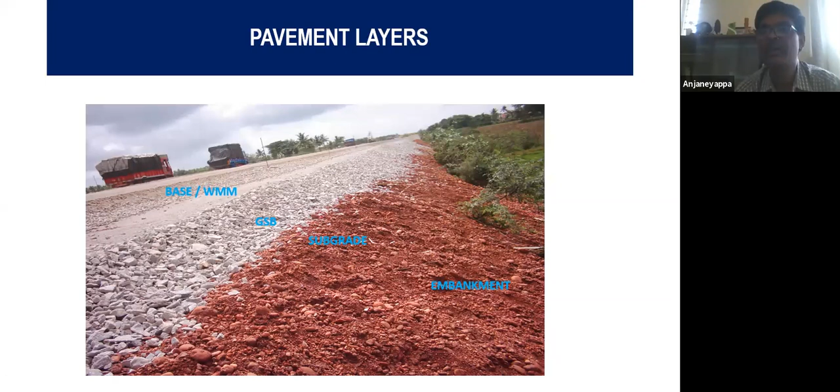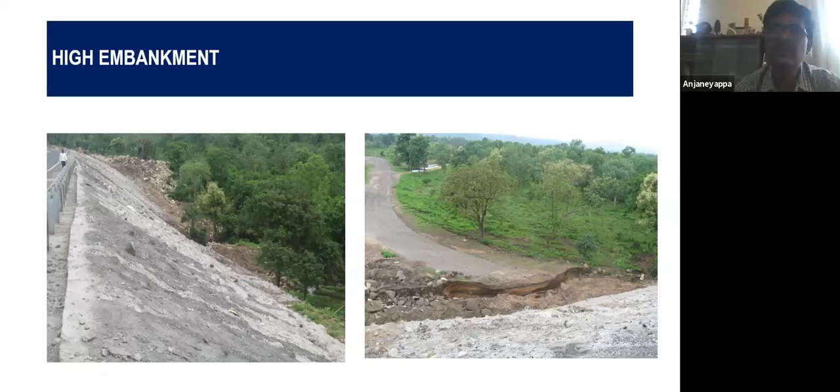This means the road industry uses huge quantities of materials, starting from earth, soil, aggregates, concrete, and bituminous materials. To summarize, we use about 10 lakh cubic meters for a two-lane road.

For a two-lane road, 10 lakh cubic meters. You can imagine a big tipper carries 20 cubic meters. For about 100 kilometers of two-lane road, we use 10 lakh cubic meters of soil, and about half of that, 4 lakh cubic meters of jelly, the aggregates, for every 100 kilometers of two-laning.

By the time we finish a 100 kilometer 4 or 6 laning, something like the Bangalore-Mysore road we are doing now, we are going to remove these kinds of hillocks from the mother earth. So huge is the quantity of aggregates we consume in road construction.

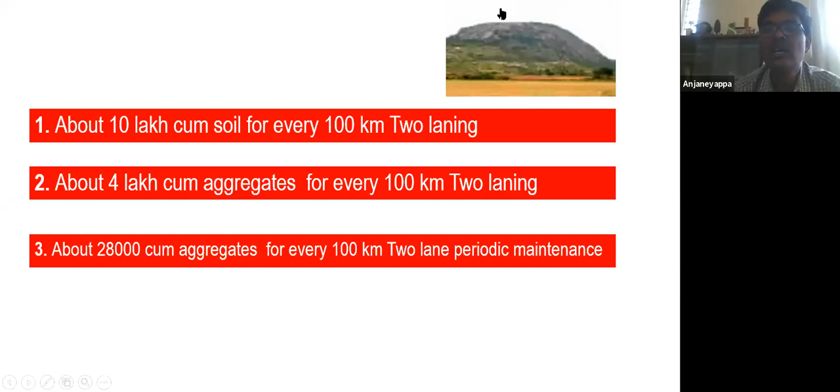Because of this, what are the challenges we face in the road industry today? Good materials - why good materials? Even marginal and alternate materials and their sources are depleting day by day. In addition, because we use good materials for subgrade and good aggregates that need to fulfill so many physical requirements, many times we may not find sources near the project site.

We may have to go away from the project road, maybe to an extent of the lowest 5 kilometers, and the farthest can be 60, 70 kilometers in northern India. This means the road industry is incurring huge transportation costs.

And when it comes to extraction of jelly, the aggregates, or even soil, there are stringent regulations from various government authorities, be it the forest department, mining department, or revenue department. So that is another constraint.

Forget about all these things, the biggest issue is, as I showed in the first picture, the huge embankment and the stream - because of this road construction, there are new erosions, new sedimentations, we are creating new streams and new courses for these streams, and we are creating numerous ditches in the name of excavation. So it's the biggest challenge.

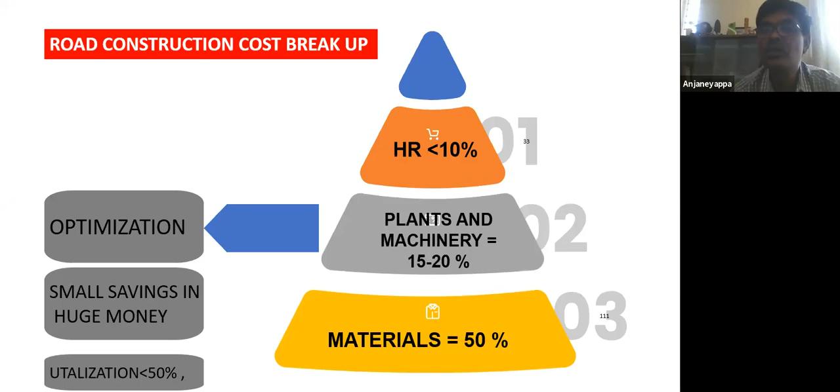Needless to say, the HR sector in the road industry is not that organized. Yes, to an extent it is organized when it comes to the big corporate companies, but most of the time this sector is unorganized. HR sector is highly unorganized, and probably in the near future we should foresee some kind of organized way in that.

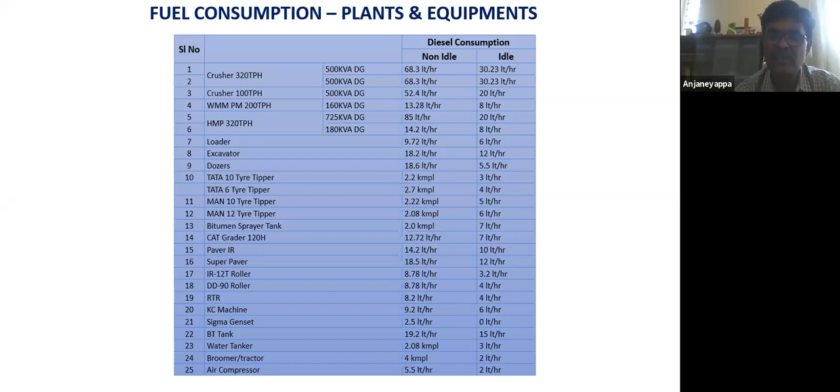Look at this - I have summarized, calculated for a 1 kilometer, one lane new road, in which we consume about 10,000 liters of diesel. This is not a small thing. Calculate this - I've highlighted for 1 kilometer, one lane. Imagine we have a huge road network of 60 lakh kilometers, and the majority of that warrants rehabilitation or new construction. Imagine what consumption of fuel is expected in the road industry.

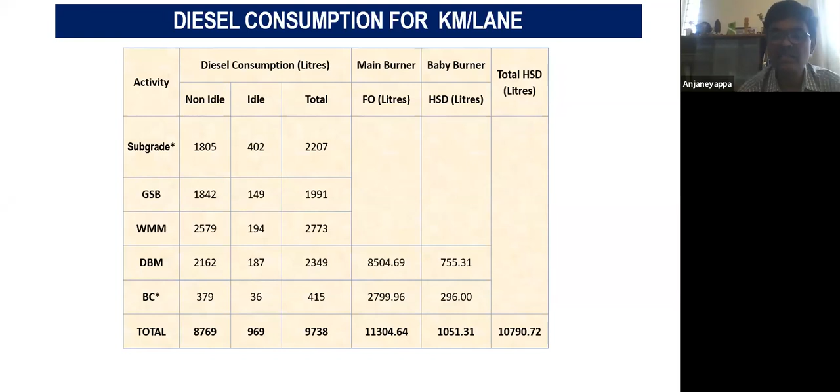And as I said, this is not just for new construction. Every 5 or 6 years we go for maintenance activity, which again consumes significant, considerable fuel. So this is another thing we need to worry about.

I was talking about the unorganized sector as far as HR is concerned in the road industry. Yes, it is highly unorganized. To a certain extent it is organized when it comes to supervisors and above - engineers and above - at least we have good corporate companies there.

But forget about engineers, the biggest employer is the road industry. That means if we want to create employment in society, we need to engage in road construction. That is why all governments, irrespective, do this many times. The road industry is the backbone for socio-economic development. If you want to build up the GDP or NSDP or anything, we need to start new road construction. So such being the importance of the road industry, and such being the biggest employer of human resources, it is still highly unorganized.

The key man in this road industry is the labor, the so-called skilled operator or skilled worker. Why I would say this is more important than an engineer is because, end of the day, in my industry - the road industry - though the DPR is prepared by an excellent consulting firm, and we assume we have an excellent management firm for supervising construction with all engineers and resources required, and further assume we have world-class equipment for execution and very good materials for road construction...

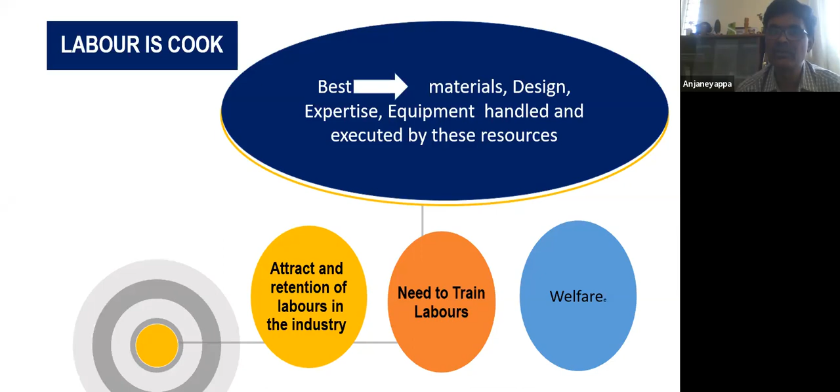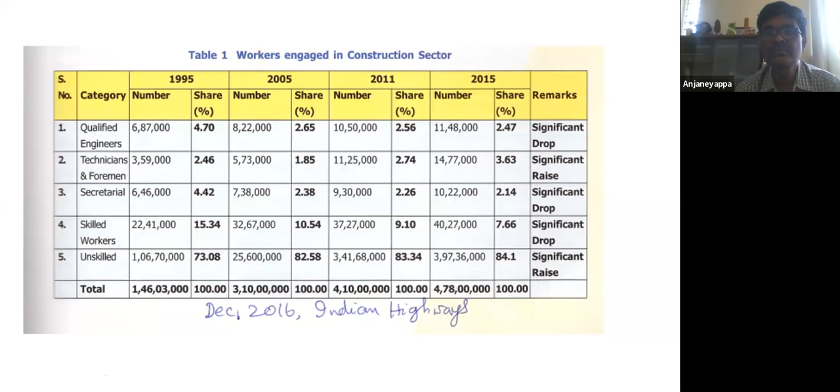So there are some constraints the road industry is facing today. You know that there are approximately 60 lakh kilometers, statistics is statistics, and we have a very small quantity of national highways, just about 2%, less than 2% of national highways, and that less than 2% of road network carries 40% of the traffic. If you add state highways to the country's network, the state highways and national highways together carry about 65% of the traffic. And if you look at the breakup...

So we have got about 30% of 4-lane roads, 25% of 4-lane roads, and about 50% of 2-lane roads in NH and SH, and about 26% of single lane to intermediate lane road network.

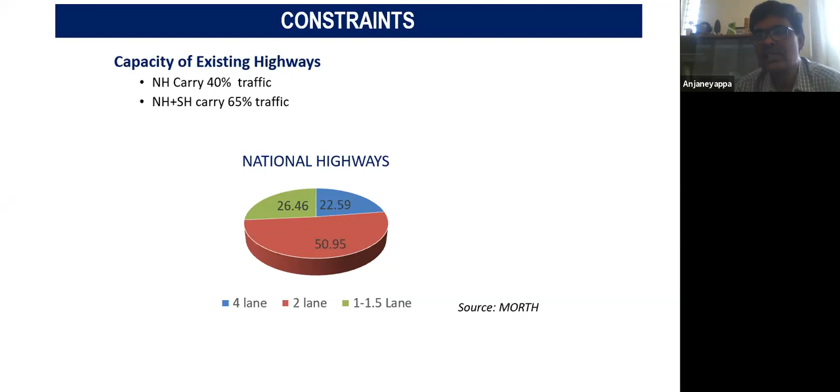What does that indicate? What is the takeaway from this? That means so far we could widen or construct multi-lane or 4-lane roads to an extent of only 30-40%, and there's a long way to go. Still another 50-60% of roads need widening as far as NH is concerned, and about 30% of state highways still need to go for 2-lane. We have got huge traffic, and almost all national highways warrant 4-lane, and almost all state highways warrant 2-lane roads, and even some state highways warrant 4-lane roads. So much is the requirement and demand.

So that is one thing. If you look at the past 2 decades, one question is, what is the investment made on the road industry in the last 2.5 decades?

And that is for new construction. We are good at constructing assets, but even today we haven't realized and geared up for the maintenance aspect. Creating an asset is one part, and maintaining it to customer and societal satisfaction is another big challenge. We are good in capital investment and creating assets, but not good in maintaining them. The end result is that maybe after 5-10 years after new construction, we end up with bad roads, and if we don't maintain further, we may have to go for reconstruction again. So maintenance of existing road infrastructure is the biggest challenge in the road industry.

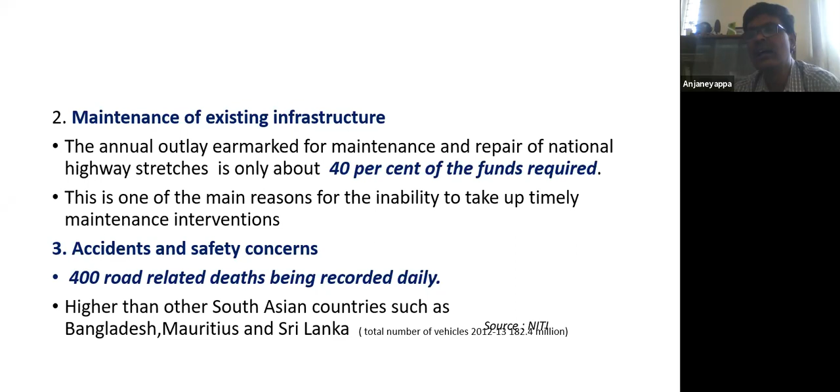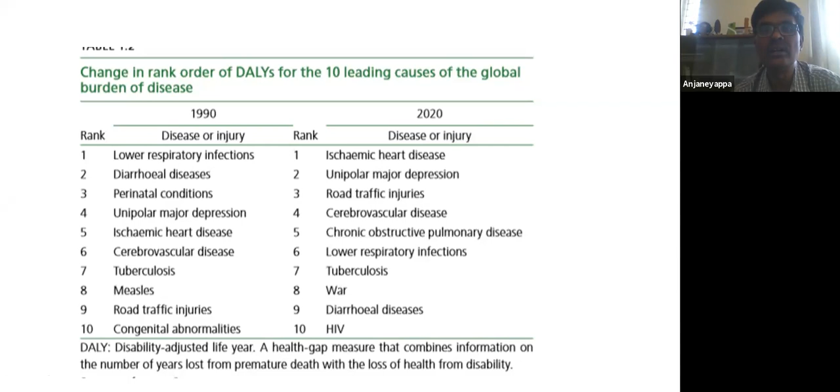The government is very serious on this, at least in the last decade. If you take the biggest causes for human death in the world, in 1990 road accident deaths were in 9th place - the first cause was respiratory infections in the 90s, and the 9th cause was road traffic injuries. Take today, 2020: the biggest reason for human deaths is heart disease, and the third highest reason is road traffic injuries. We have elevated from 9th position to 3rd position, and so many lakhs of people are dying every day, every second. This is the biggest concern, and not enough concentration is on this.

These are the death rates, and when it comes to Karnataka, we are not lagging as far as accident deaths are concerned - we stand somewhere 3rd or 4th position in India in terms of highest death rates. There are many reasons for these accidents: overspeeding, driving on the wrong side, overtaking, use of mobile phones, violations. The biggest reason for deaths is overspeeding.

So controlling the speed is one method to control accidents. You may ask, what is the purpose of a road if you control the speed? The high category roads, national highways, state highways, are meant for mobility. The lower category roads, like village roads, are meant for connectivity - connecting to give access to social, economical, educational facilities, hospitals, schools, marketplaces. Speed is not the criteria there.

When it comes to higher category roads, national highways and state highways, the intention is to give mobility to the extent possible. That means if I want to travel from Bangalore to Hubli, I need to maintain a certain speed so I can reach Hubli in the right time. So there I cannot control the speed - there should be enough speed, enough mobility. So maintaining mobility while controlling safety is the biggest challenge today for stakeholders in the road industry.

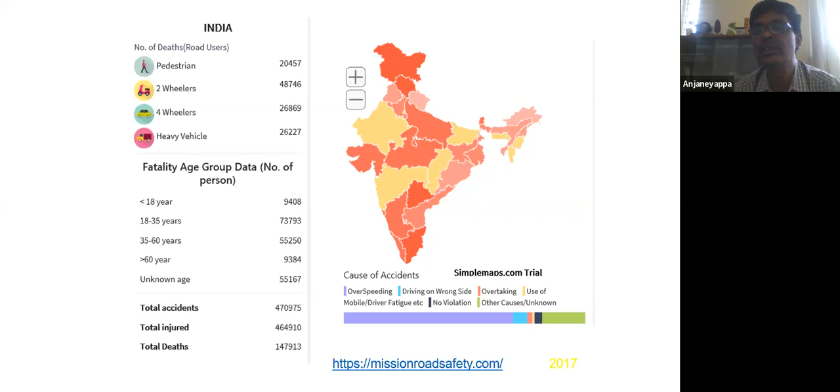If you take the various reasons for accidents, about 70% of factors are contributed by the human being. Because of him, accidents are occurring. But there are engineering causes which we road engineers can take care of. That's about 26 to 28% contribution from the people involved in road building, road design, road construction. So concentrating on constructing forgiving roads, safe roads, is the need of the hour, and that is the biggest challenge today. We road engineers are contributing to road accidents to an extent of 20-30% by constructing bad roads, and we need to take care of that.

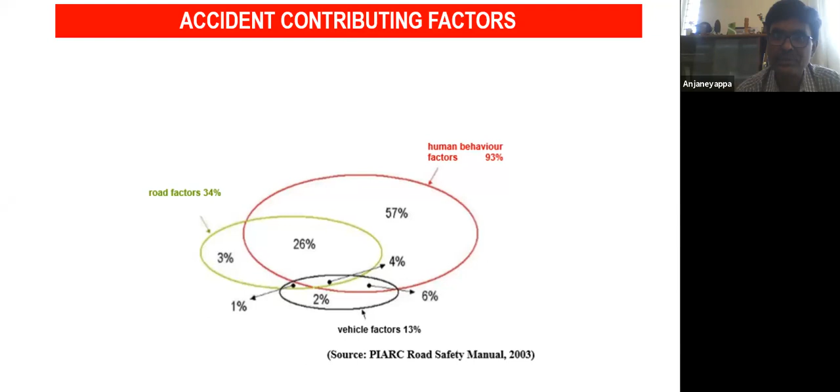So what is the biggest loss for the society? It is estimated that about 1 to 3% of the total GDP is the loss to the society. And it is estimated that about 500 billion is the loss to the world, just because of road accidents.

Then comes the carbon footprint, the emissions. If you take global emissions, we are the biggest contributor. On one side we need good roads, we need to construct roads, we need to maintain roads, because that is the backbone for economical and social development. On the other side, when it comes to environment, we are polluting to the highest extent. Transport contributes 14% of total global emissions. Transportation sector contributes 14%, that is a significant portion. In that, the road sector alone contributes 72% of that 14% of emissions. It is not a small thing. It's really a challenge for the industry and engineers to worry about.

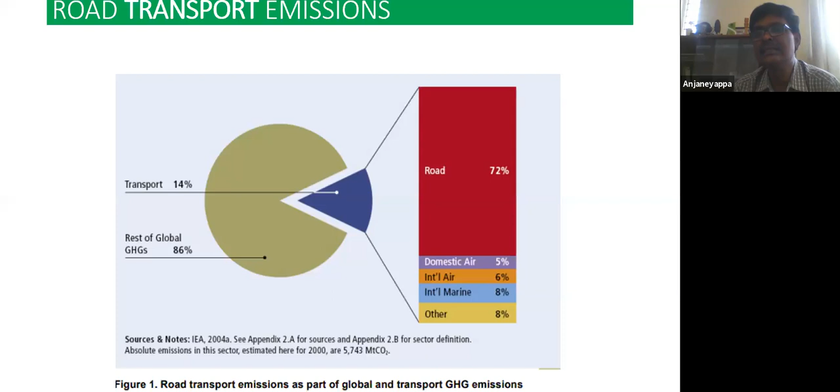So what are the answers for all these questions? Whatever challenges I have mentioned so far, there are no simple overnight solutions. And what is required? Like other big people say, I also concur, some kind of creative mind, some kind of out of box solutions are required to tackle that. Can we solve this overnight? No, we cannot. But we need to accelerate the solutions, the alternatives in this direction. That's what the industry is doing, but the rate of changing this is not sufficient. I don't know the reasons.

Having listed so many challenges, you may ask, are we not doing anything to answer these challenges as solutions? Yes, we are doing, but as I said, it is not enough.

Some of these alternatives are, as we all know, we need to go for locally available materials in the road industry. When I say locally available material, it can be industrial byproducts, marginal materials - all these can be used in appropriate layers, at bottom layers, through appropriate engineering measures. Please remember, I trust God has not created any waste material. There is no waste material on this earth. So let us not use the word waste material - at the most we can say marginal material, alternate material. So they are also precious materials, and we need to go for them in a big way. And of course we are at that - you name any material, yes it can be used.

No need to reinvent the wheel. If you ask, can we use this material? I would directly say yes, without any second thought. Only some modification, some changes, some engineering is required to use those materials, and these engineering measures are not complex - they are very, very simple. So any material can be used. We need to go for locally available materials so that we can reduce transportation cost, reduce the depletion from excavation, the extraction of jelly, the aggregates from the quarries, from the mother earth.

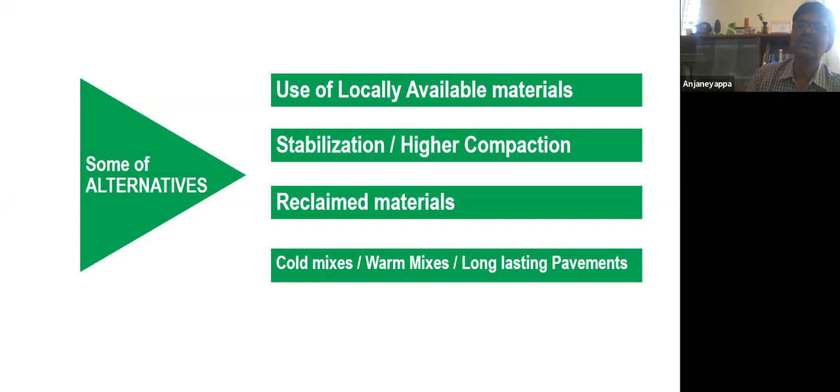And the second alternative we are doing today is stabilization. We need to go in a big way with stabilization - it's the oldest technique, but we need to go for that. Even if you look at the pavement design in previous revisions, not much concentration was given. It was given, but we were not practicing it.

If you look at the latest revision, IRC 37, they have given enough thrust on this. We need to go for stabilization of the pavement layers. What are the advantages of this? We can reduce the thickness of the top layers so that material consumption can be reduced.

We need to go for reclaimed materials. We have to reuse the materials. It's old technology, there's no need to reinvent it. Yes, we need to go for the reuse of materials, and of course there are technologies available today.

We can think of using cold mixes where we can reduce the emissions. We can extend the working hours. And then we should go for long lasting pavements, where we design the pavement such that it lasts for longer durations. So these are some of the alternatives that the industry is currently practicing.

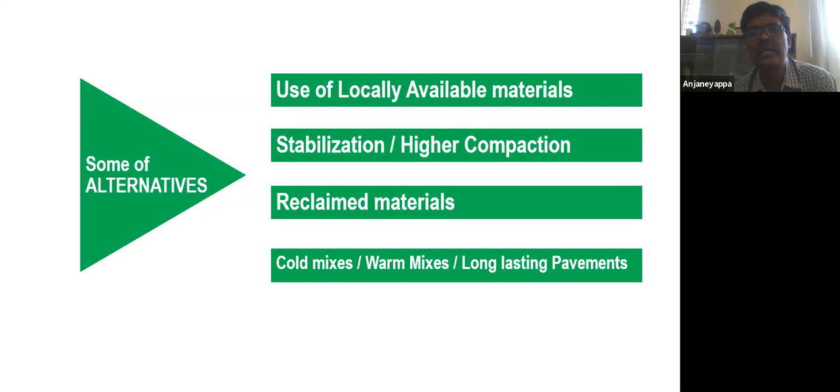Is that sufficient? Definitely I would say no, it is not sufficient. It is for the young engineers today who should come out with a solution. I am not foreseeing any immediate magic solution, but I am damn sure that the next generation, the budding engineers, will come out with big solutions for all these challenges.

We need to stabilize the subgrade or these base layers or sub-base layers so that the layer thicknesses can be reduced. If you take the thickness of layers, it's about 1 meter today. If you cut open any good pavement, you find a 1 meter crust. So we can reduce the consumption of materials.

We can stabilize weak materials, any weak materials which have low strength, low modulus, by either mechanical stabilization or by adding stabilizing agents, conventional ones like lime, cement, or anything. There are also a number of commercial stabilizers available in the market that we can make use of.

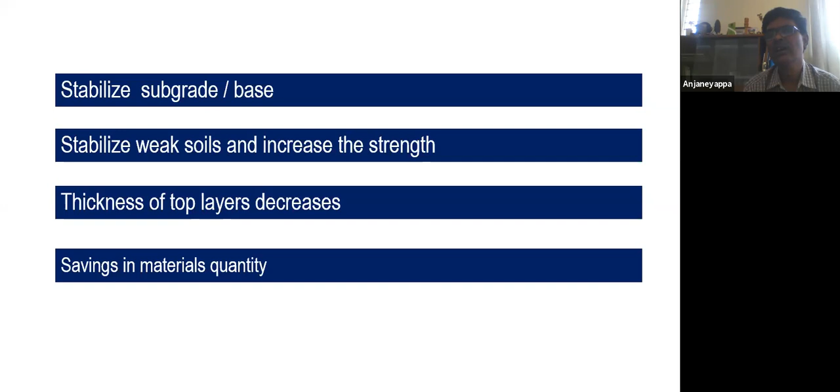We can use commercial stabilizers. There are many, but the only concern is you have to work out the economics. If it is economically viable, you can go for the use of commercial stabilizers. But still, in a big way, you can rely on conventional stabilization techniques using stabilizers as well as mechanical stabilization.

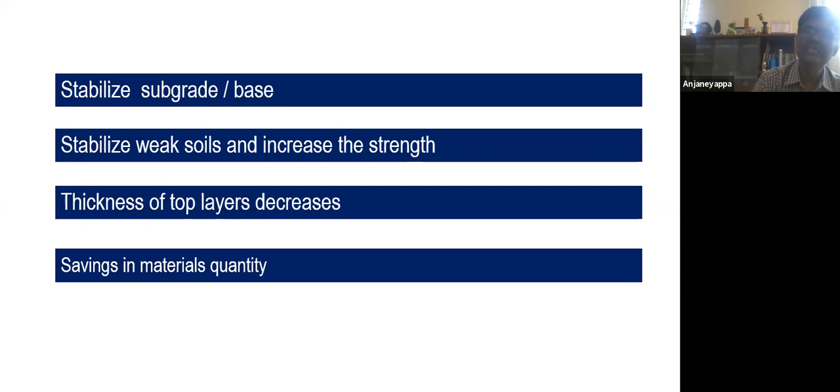So these kinds of stabilization result in a huge reduction in quantity of materials and thickness of pavement layers. If you ask me, are there any guidelines or methods? No need to worry, everything is in place. Not only today, it has been in place for several decades. There are a number of IRC guidelines in India or global guidelines where we can make use of these guidelines without any fear.

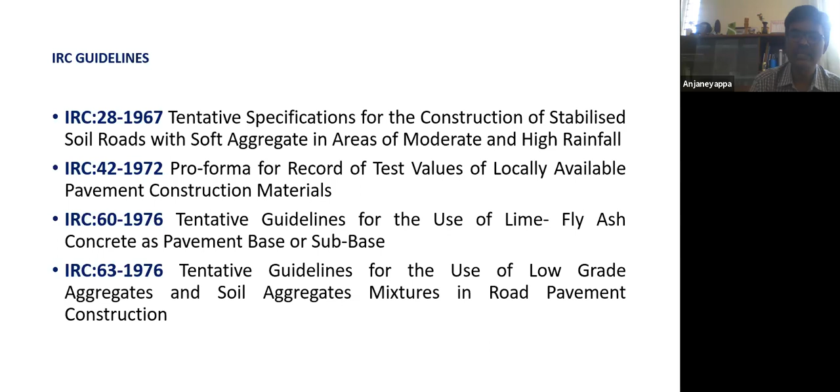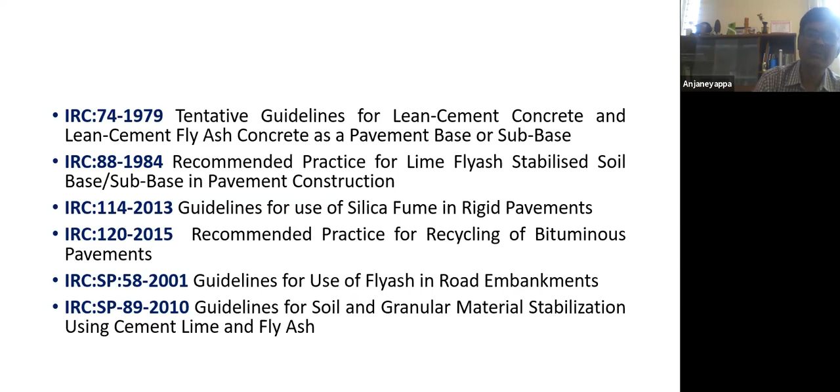So we can make use of slag. Of course, it is very much used today. The slag can be used as granular layers. It can be used in asphalt layers. It can be used in concrete pavement as both unbound and bound layers.

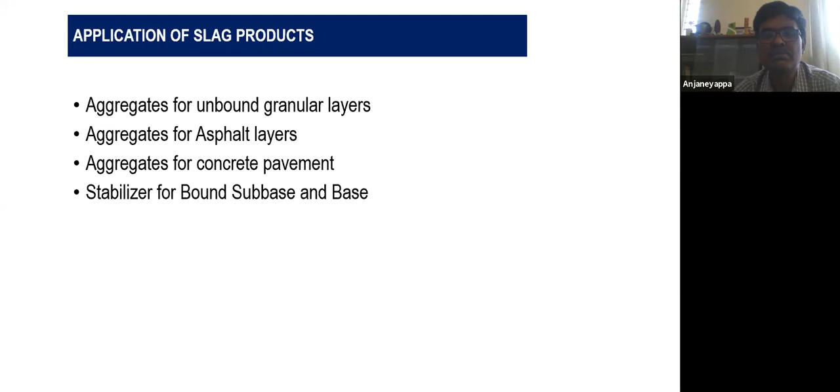Why does this happen, in spite of such a huge amount of money invested and good materials used? This is because of improper design, especially this kind of distress results from improper design and improper bitumen used in the mix. So we have to take care of that.

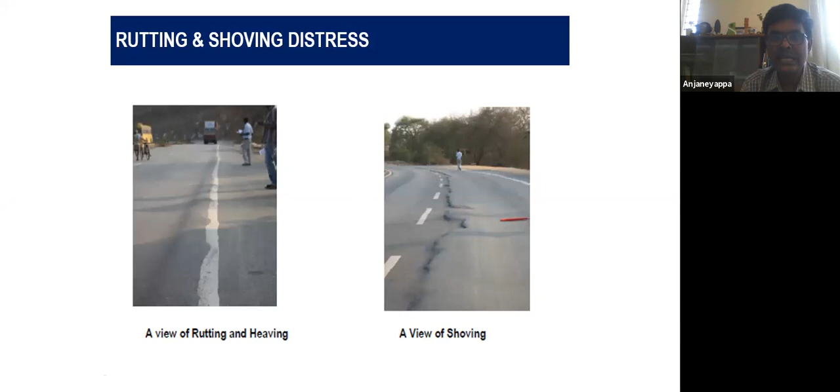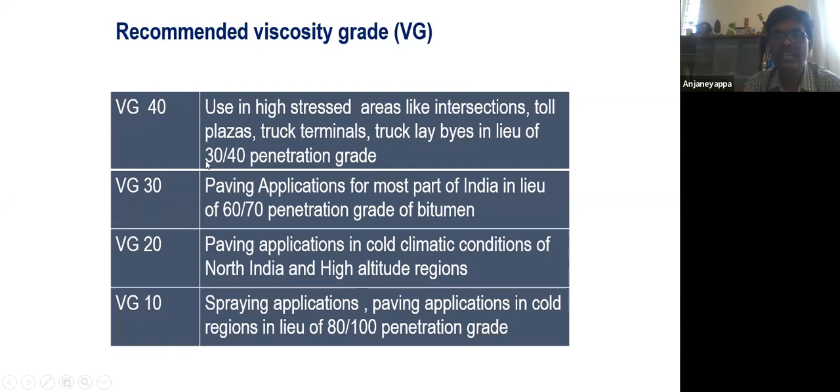There are many things to tackle those kinds of problems, apart from using good mix design, good gradation of aggregates, and good binder. Today we have different binders based on our requirement. Generally we go for VG40 or VG30, viscosity grade 40 or viscosity grade 30 bitumen, for construction. So based on the traffic requirement, we select the appropriate bitumen. Selection of bitumen is an important task. There are different modified binders in the market for construction—polymer modified, rubber modified.

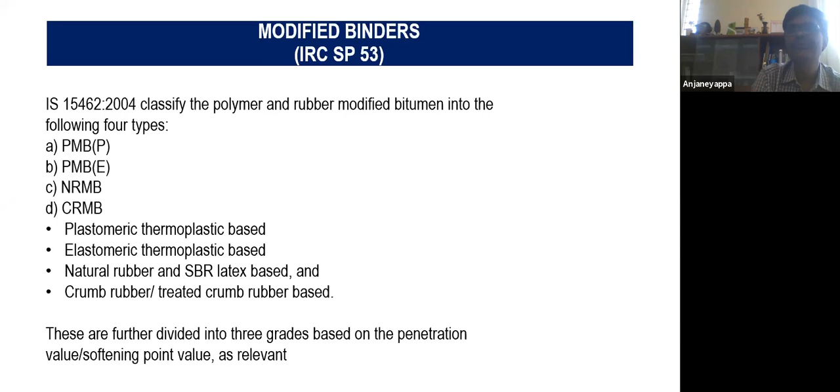There are different varieties in polymer modified or rubber modified bitumen, and all these modified binders can be made use of. The advantages of using these modified binders - these binders are used especially in the surface layer, the bituminous concrete surface layer, not in the bottom layers.

Using these modified binders reduces the susceptibility to temperature variations, because bitumen mix is thermoplastic, and the performance and stability of this asphalt mix depends on temperature variations. A modified binder gives high resistance to deformations and deflections. It reduces cracking, reduces aging, gives good adhesion, and long lasting life, and overall improves the performance of the bituminous layer.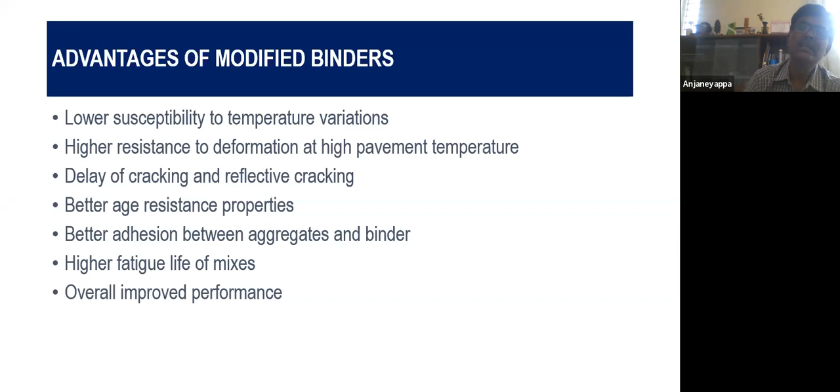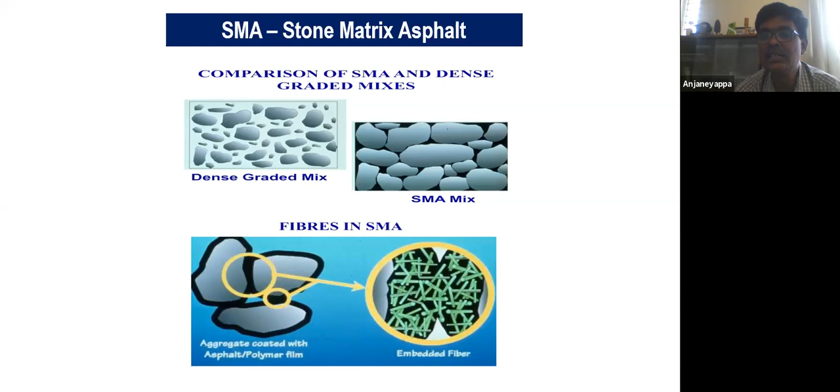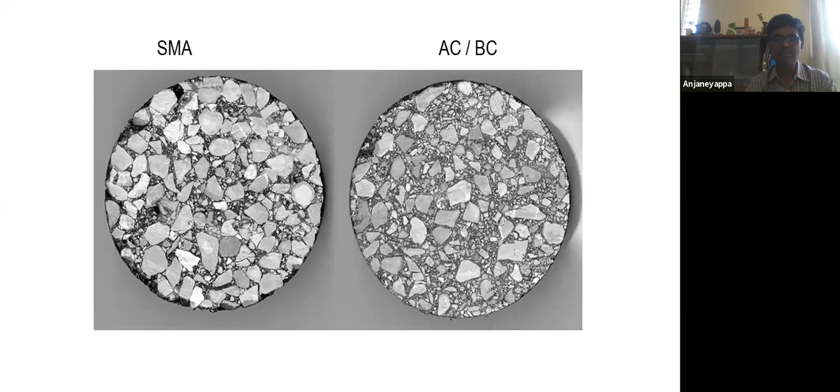So there are different mixes in use today. For the last decade we have been using different types of special asphalt mixes. One such mix is called stone matrix asphalt. Wherever there is high truck traffic or high axle load traffic, engineers recommend stone matrix asphalt, which has a high quantity of binder, bigger size aggregates, and fibers in the mix. This reduces deflection or deformation due to high axle loads, so the life of stone mastic asphalt is longer compared to the bituminous concrete surface.

For the last 10 years we have also been using, though not widely, stone mastic asphalt as a structural layer. Then there is another layer called micro surfacing, used for maintenance of existing pavements, to increase riding quality, to cover depth, and to resist the raveled surface.

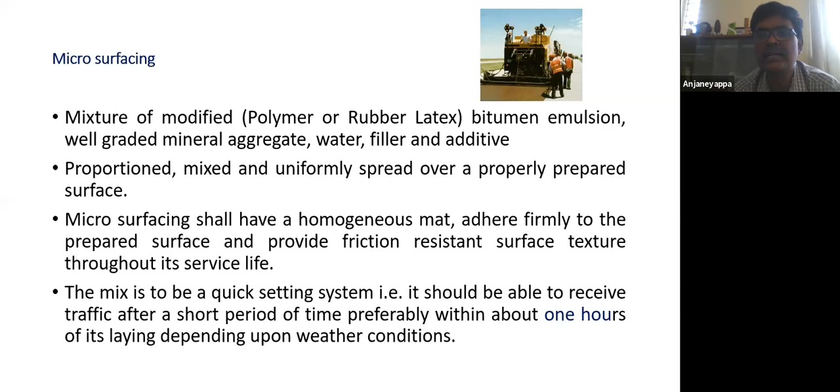This micro surfacing mix is a modified bitumen mix with well-graded aggregates, filler and special additive. We don't need any rollers - no compaction is required. This mix is prepared in special machinery mounted on a truck, so the mix is prepared in situ, spread in situ to the required profile, and it settles within about an hour, after which traffic can be allowed.

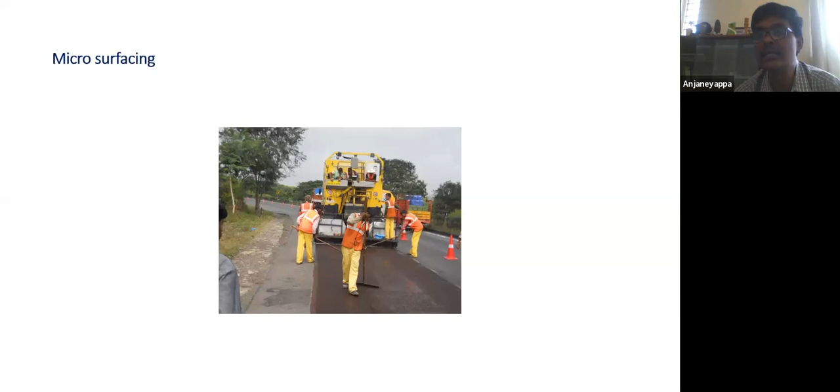So what are the advantages? It reduces some kind of emissions and can be used as a maintenance layer. Performance reports say it gives good performance, but the precaution is that this is a thin layer, and any thin layer is only meant for maintenance - it will not add structural strength to the pavement layer system.

This is another way of micro surfacing. If you take the bituminous mixes, they are broadly categorized into 4 categories. We call it a cold mix when used in the 0 to 30 degree range of atmospheric temperature. We call it a half-warm mix if used when the mix temperature is in the range of 65 to 100 degrees. We call it a warm mix if used in the 100 to 140 degree centigrade range. We call it a hot mix when the mixed temperature is more than 130 to 140 degrees during preparation.

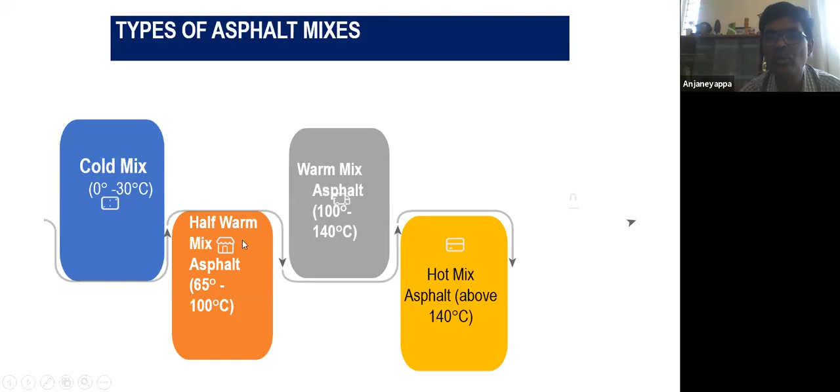So all the mixes we conventionally see are hot mix, and nowadays cold mix is also gaining momentum. Micro surfacing is a cold mix, and warm mixes are also gaining momentum for their advantages. We can use cold mixes for any layer where we would otherwise use hot mixes, using different types of emulsion - rapid setting, medium setting, or slow setting - depending upon the type of mix, whether it is dense bituminous macadam, binder layer, bituminous concrete, or any other thin layer.

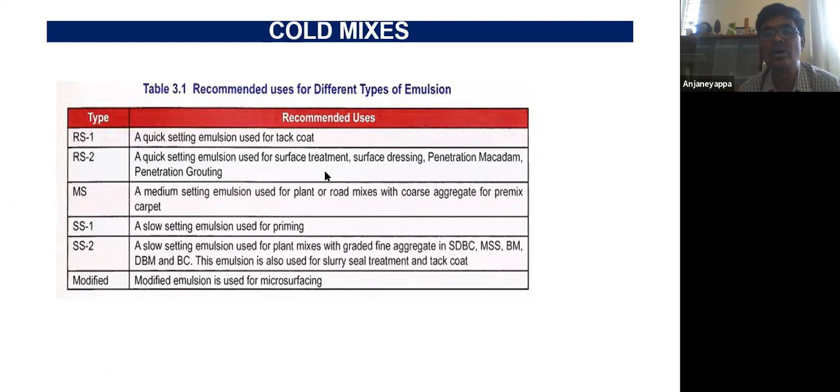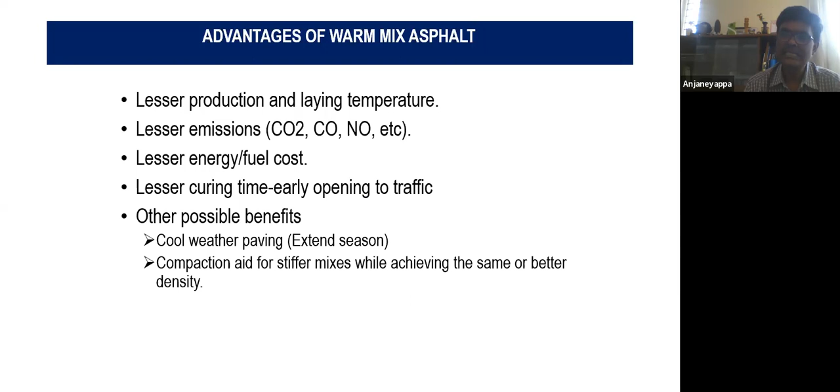So this kind of cold mix is in use today. These practices have been in use for the last decade, gaining momentum in our country. The advantages of using warm mixes: while hot mixes need temperatures more than 130-140 degrees, warm mixes can reduce the mix temperature by about 30 degrees. This reduces fuel consumption, reduces emissions, and allows earlier opening to traffic. Another advantage of warm mix is that we can construct roads even in cold weather. There are other mixes too, like open graded friction course.

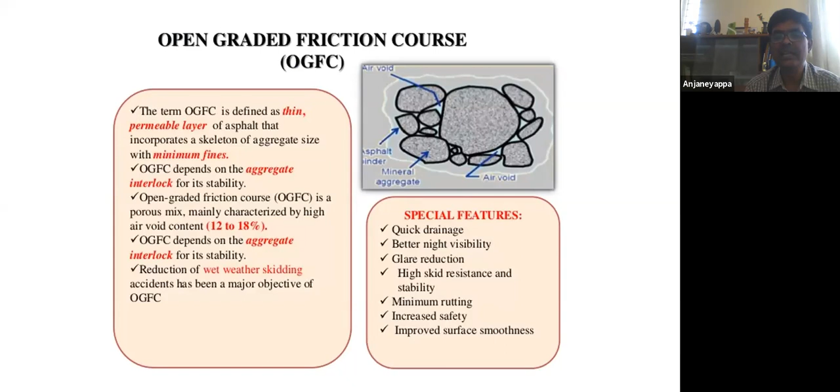This is a thin permeable layer where strength comes from aggregate interlocking, and this kind of layer reduces wet weather skidding. Especially these mixes are used in high speed roads where speed is high. The advantages of using open graded friction courses are quick drainage, better night visibility, glare reduction, and rutting problems will be less, so we can have improved safety on the roads.

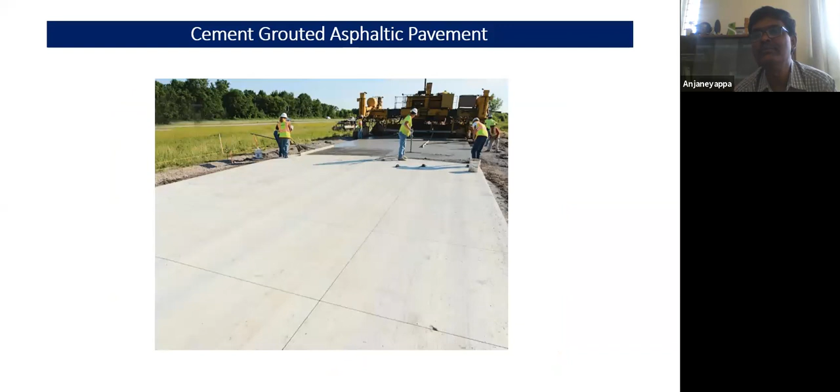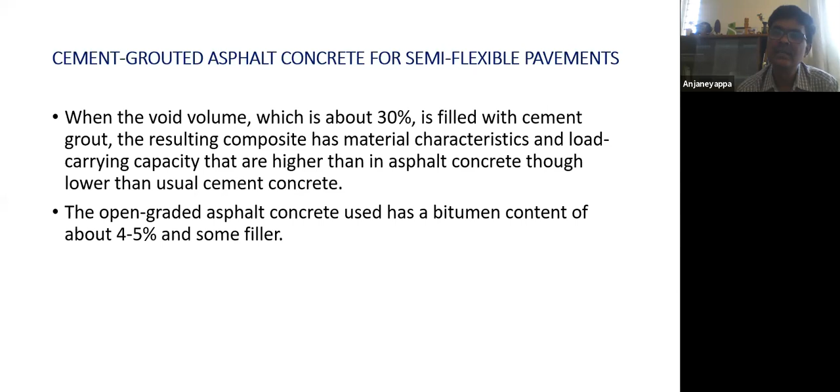People are also, here and there, if you look at the literature, not in our country, trying cement grouted asphalt mixes. So what is that? Cement slurry is injected into asphalt mixes which have high voids in the range of 20 to 30%, and the cement gets injected into these voids, so that the rigidity, modulus, strength and stability increase, hence the performance. People are trying this, but it's not yet in practice, mostly in the laboratory and here and there pilot studies. Not in our country, we are yet to start that.

Then comes white topping, which Bangaloreans are quite familiar with. We have started using this kind of white topping in this decade, and now in a big way, several hundred kilometers of roads have been constructed in Bangalore city using white topping. What is this white topping? It is construction of a cement concrete layer, a thin layer, over the existing bituminous layer. Different types of white toppings are there.

Thick white topping is when the thickness of the layer is more than 200 mm, similar to our cement concrete layer. Then comes thin white topping, that is what we are doing in Bangalore city, where the thickness of this cement concrete layer is 100 to 200 mm.

This is constructed as a bonded layer, and if we want, we can also use fibers. The advantage of white topping is that in a normal cement concrete layer the joint spacing is about 3.5 to 4 meters, but here the joint spacing is about 0.6 to 1 or 1.2 meters. So the behavior is flexible, not rigid, it behaves like a flexible pavement.

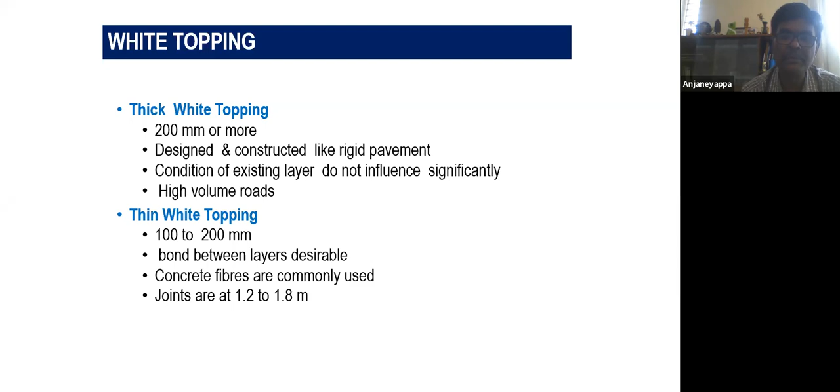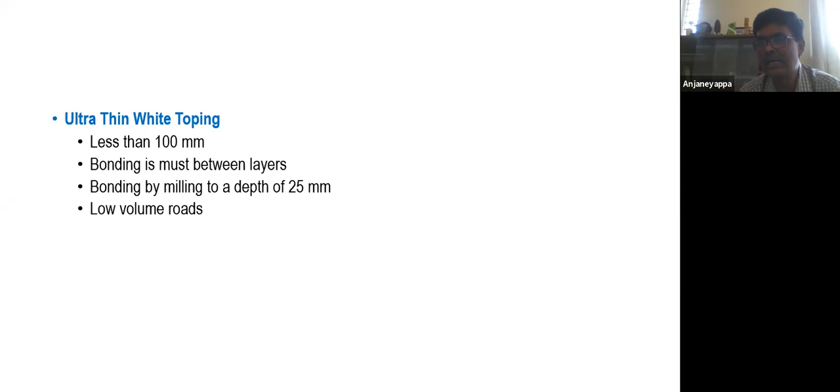Then we have a third type, ultra thin white topping, if the thickness of this concrete overlay is less than 100 mm. This thin topping can be used for low volume roads, arterial or local streets.

What are the advantages of using white topping? Long life, low maintenance if constructed properly. We don't find distresses like rutting or other deformations. It gives high structural stability and structural strength to the pavement layer system. These are the advantages.

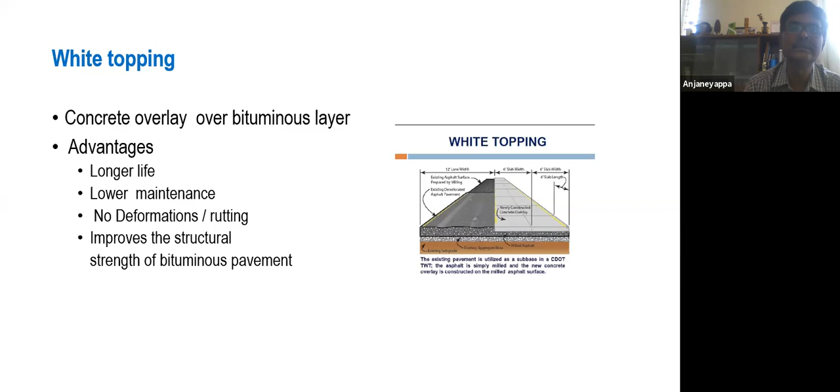Then we have pavements like interlocking concrete block pavements. These can be used for regular roads also, though not quite popular in our country. Here we mostly use them for footpaths, but in other countries they are used in main carriageways also. Here also it can be used. In some states they have used it, in Maharashtra, Kerala, yes, it is used in junctions and streets where digging up for maintenance activities for utility lines is quite high.

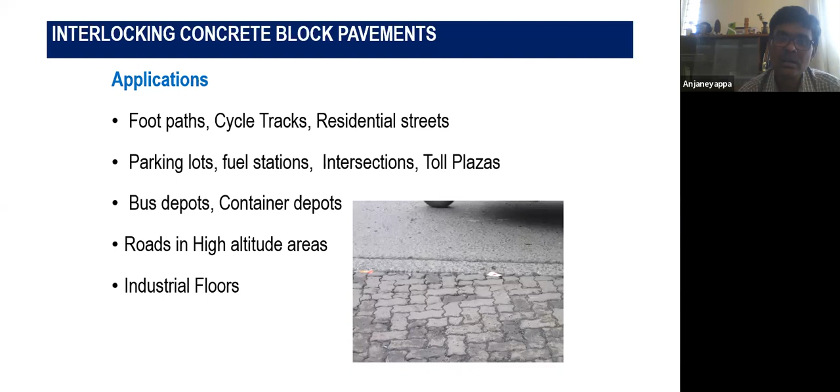The advantage of using interlocking concrete block pavements is that maintenance of utility lines becomes easy. We can take out these blocks, attend to the cables or water supply lines, and then reuse the same materials and reconstruct, so we don't find any distress. This can be used in parking lots, bus depots, regular pavements, footpaths, cycle tracks, residential streets. The only thing is we need to construct in a good way, because most of the times these layers get a bad name due to poor quality construction. So properly constructed ICBP layers give good performance.

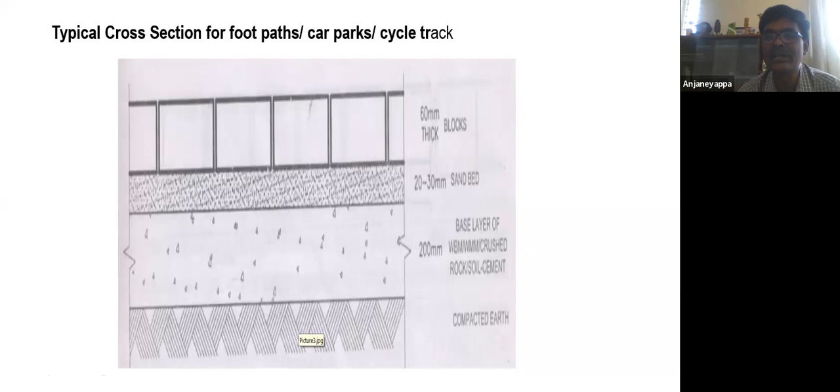This is a typical cross section of the ICBP where you have all the pavement layers. One additional thing is we have the sand bed layer. Using appropriate sand for filling and the sand bed is quite important here, and compaction plays a big role.

Then we have composite pavements. What is this composite pavement? If there is an existing asphalt pavement, we can go for a concrete layer. If there is a concrete layer, we can go for an asphalt layer over that. Or if there is a stabilized layer, we can go for a concrete layer or an asphalt layer. So the flexible behavior and the rigid behavior are combined, and these composite pavements can also be used.

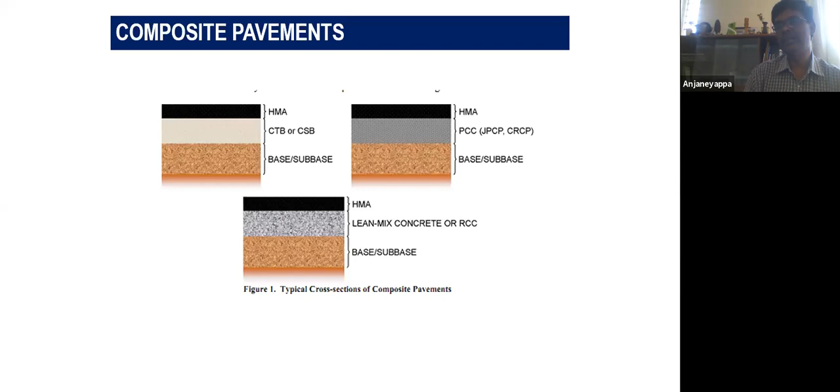So if you ask me today whether we can construct an asphalt layer over a bituminous layer over a concrete layer, yes. If you ask me concrete layer over asphalt layer, yes. The advantage is that the strains generated will reduce, and instead of strains being generated at the bituminous layers, it goes below the rigid layers. So the performance, stability, strength increases, and life increases.

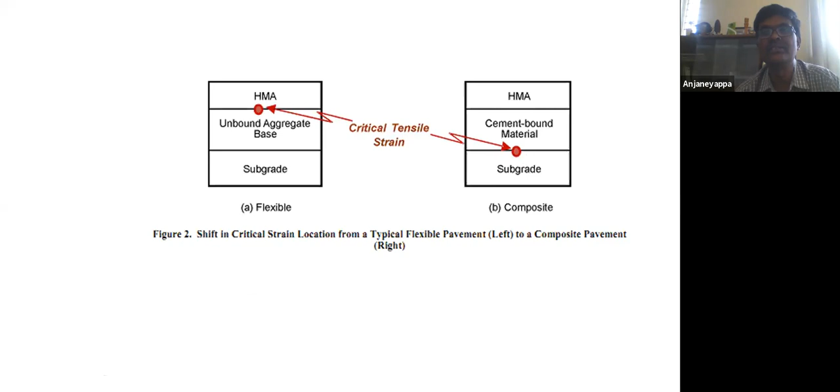So we have been talking about reuse of materials, recycling of materials, and fortunately, all the guidelines are in place.

The rules are also met, but somehow we are lagging. There is no need to reinvent the wheel, but still we are lagging. Now the stakeholders and clients are putting a lot of pressure to go in for recycling, and society is also putting pressure on the road industry to adopt recycling. So what is this recycling?

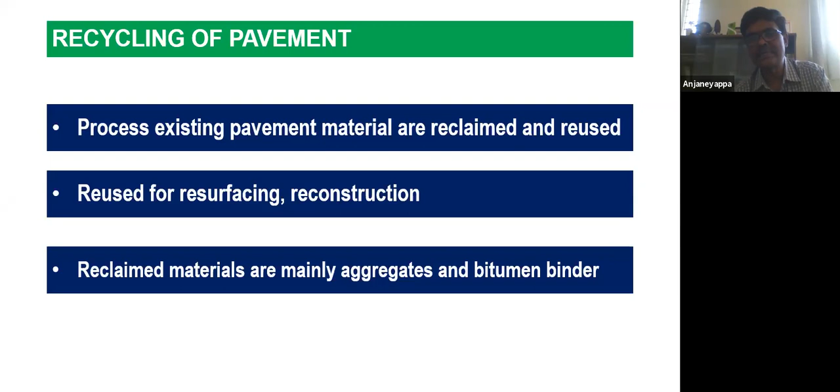Make use of the existing pavement materials, whether it is aggregates, soil, bitumen, or concrete. All these can be reused, maybe for reconstruction, maybe for resurfacing. Different types of technologies are there in recycling.

We can adopt cold mix technology where emulsions are used, or hot recycling where we adopt a hot process. We can also adopt in-situ technology, where within the site itself a chain of equipment comes which scarifies, mills the material, mixes, then paves, then compacts on site itself. That means taking the milled or scarified materials away from the site is not required.

Or we can take the reused, reclaimed, milled, scarified materials to a centralized plant. There we can produce the mix, bring it back, and reuse it. Such technologies are called in-plant technologies, while in-situ technologies are called in-place technologies. All these technologies are in use here and there.

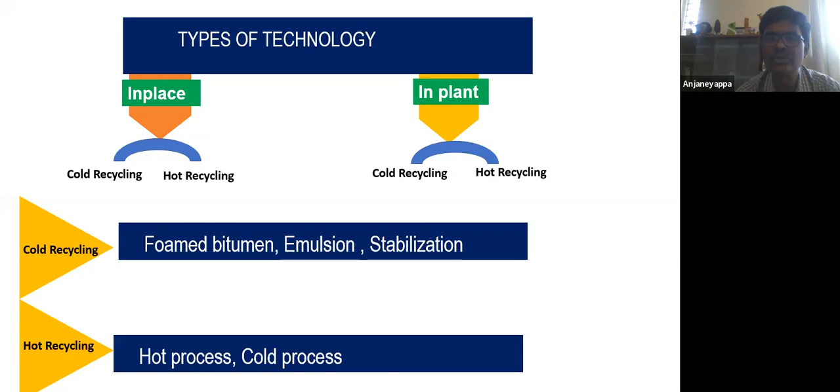India has also started constructing using these methods. Karnataka too is now going forward, and you may see a lot of recycled material roads in the near future. The clients are serious, and PWD is very serious on this.

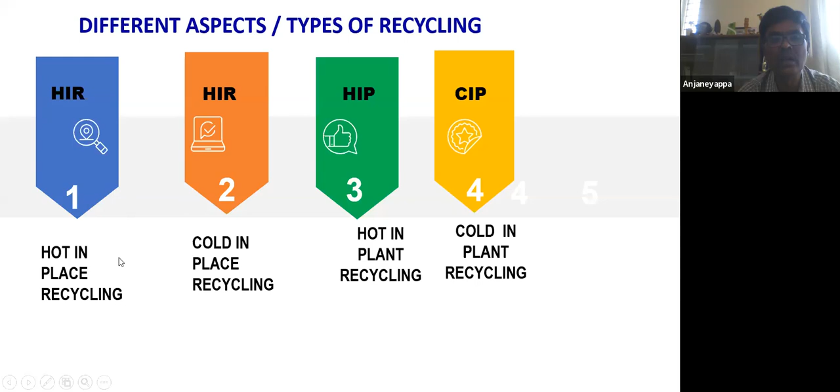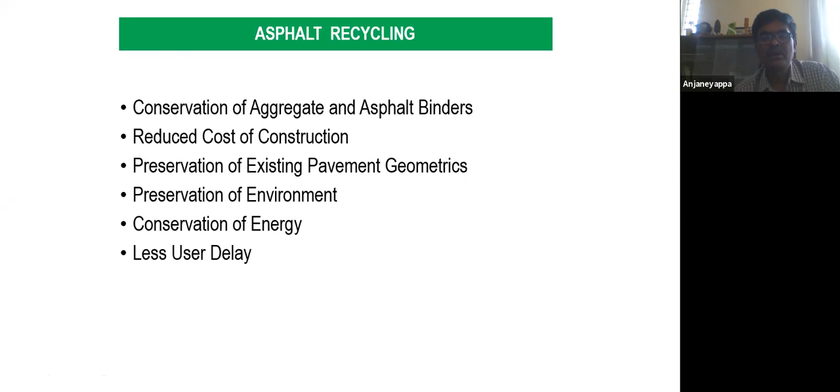So to begin with, hot in-plant recycling and cold in-plant recycling can start, and later there are some limitations and extra precautions required for this - economics, finance, all those things. So later, maybe we can think of in-place technologies. This recycling technology, needless to say, reduces the consumption of materials, cost of construction, preserves the existing geometry, is favorable to the environment, and reduces energy consumption.

If you look at all these things, you may ask why we are not changing fast given so many challenges. Yes, we have been changing. We have been adopting the latest technology, new technology.

In the last 20 years, earlier we were using a layer called waterbound macadam. Today it is outdated; we are not using it mostly, and instead using wet mix macadam. We were not using GSB, we were using conventional GSB. Today we are using non-plastic GSB, and again for the full width.

We were using BUSG, bituminous macadam. Today we are going for high quality mixes like DBM. We were using chip carpet; today we are no more using chip carpet. Today we are talking about SDBC, microsurfacing, and so on.

We were using 3-wheel static rollers. Today we have advanced plants and machinery - vibratory rollers, pneumatic rollers, and so on. We are preparing estimates; today we are talking about project reports and DPRs. We were using drum mix plants; today we are using 3-stage, 2-stage modern crushing plants. We were using backhoes for spreading; today we are using graders. There have been a lot of changes in the industry, and many more changes are required.

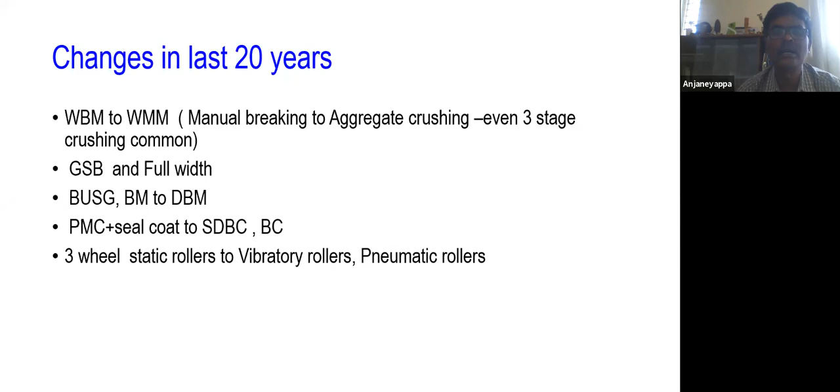Thank you for your kind attention and patient hearing. My discussion is over. Over to you, ma'am.